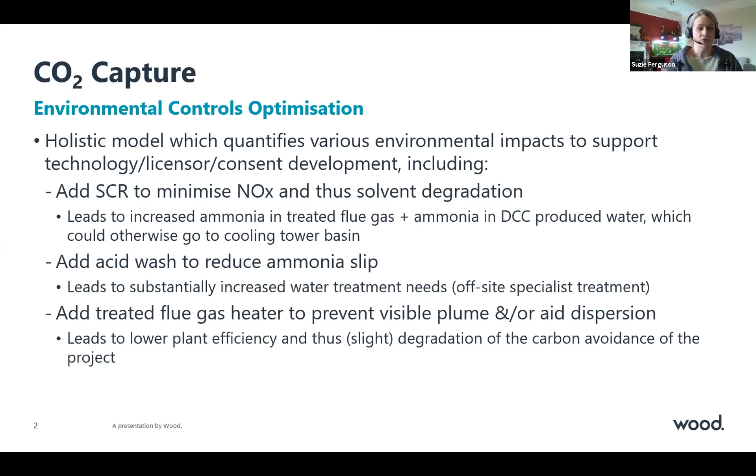So this is my suggestion from the area of CO2 capture, specifically for post-combustion applications.

Then in terms of hydrogen, I can't imagine anyone will be too surprised to see this suggestion. So Wood wears two different hats when it comes to blue hydrogen generation. Our group in Milan are specialists in being a licensor for steam methane reforming technology.

But in the UK, in our consultancy office, we're very much technology neutral, and we very frequently do licensor selection for things like hydrogen units, in particular for a refinery, where we'll get multiple bidders in, and it won't always be our technology that gets put forward. It will be the technology that's right for the project.

So something I would like to see is that, very often, because of the nature of how we're trying to predict the future and where the future is going to go, it's completely understandable that where information is available on a technology like the ATR with gas heated reformer, and that particular information in the public domain has a better performance compared to, say, the SMR that's in the BEIS benchmarks, it's completely understandable that all of the models subsequently developed from this, like the energy systems models, would therefore always choose an ATR with the gas heated reformer.

What we would like to see, or what we understand, is that there are 3 different technologies that are all very level from a competition point of view. It's very difficult to understand whether or not there's a genuine difference in the technology's ability to compete. The chemistry, when we've modeled it as independent consultants, is actually very similar between the ATR and SMR routes, with some more beneficial for different applications.

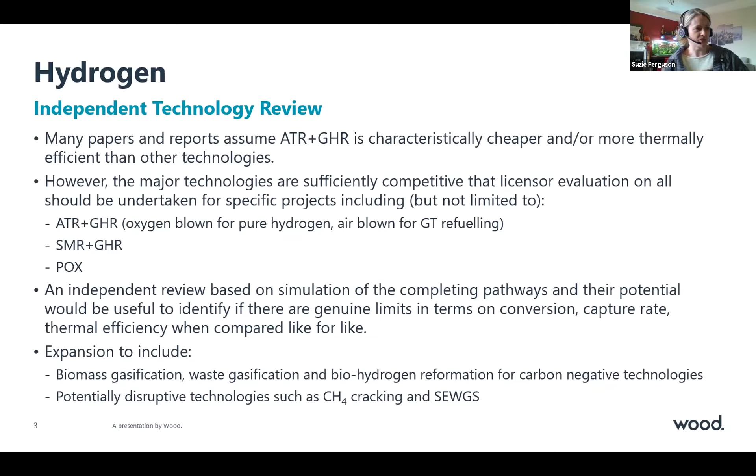My last slide is just two other ideas I wanted to throw out there. It may be that this has already been covered, and I personally don't spend a lot of time reviewing what's available. So apologies if there are studies already put out into the public domain that I just haven't seen yet.

I think it would be really useful to see a review of feedstocks available in the UK that can be used to make negative emissions hydrogen. That's either light liquid feedstocks, for example bioethanol type glycerol waste streams—glycerol is a byproduct of making biodiesel from vegetable oils. It's particularly suitable for reformation, which if you put CO2 capture on that reforming plant, would give you a carbon negative process, depending on all the other life cycle emissions through the process.

And the same for gasification—how much biomass and waste is realistically available, taking into account that we hope to have a more circular economy going forward, and therefore less use of plastics going to landfill or incinerators that would then provide feedstocks for gasification. So how much hydrogen could we make by these different routes, I think would be really interesting.

Then on a much more technical point, there are challenges when you take an existing fired heater and want to increase the quantity of hydrogen in its fuel gas, or change its fuel gas in some substantial way. We've looked at some really interesting projects where we would replace refinery fuel gas systems with hydrogen, or increase them to say 50% hydrogen.

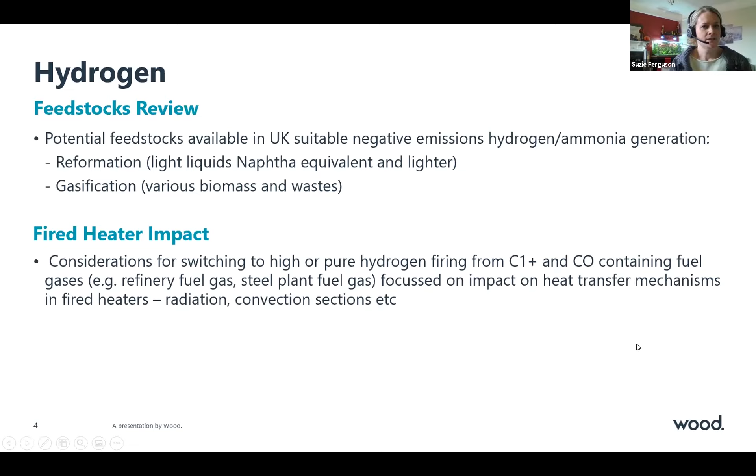Oh, that's great, some really nice thoughts, Susie. I love them, even if I don't understand them all. I'm sure a number of our listeners will.

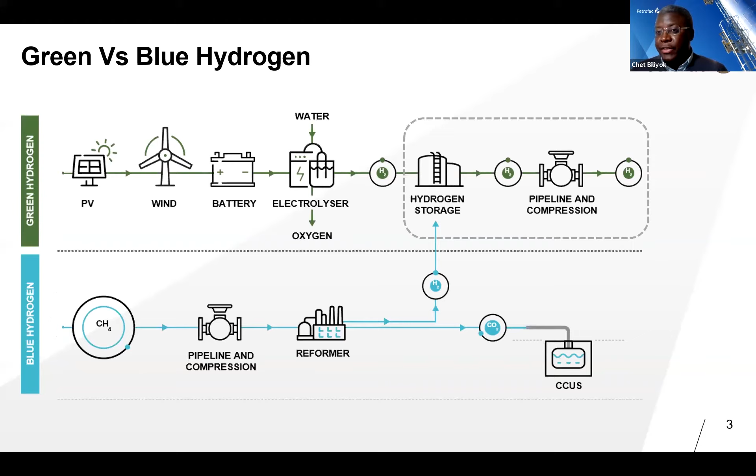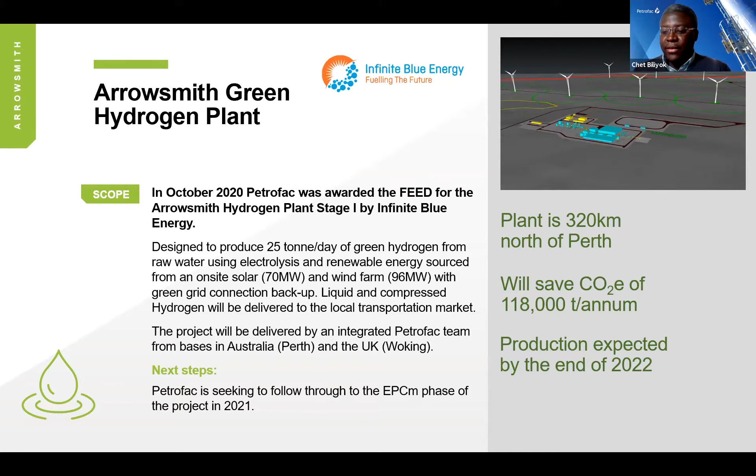Over the past 6 months, I've been working on this Arrowsmith Green Hydrogen project. I've been the process lead for it, among other things I do at Petrofac. It's a project I'm delivering in Australia, based in Perth. We are rounding up the FEED now, and it's going to be a 25 tons per day project using solar, wind, and grid connection to generate hydrogen with electrolysis.

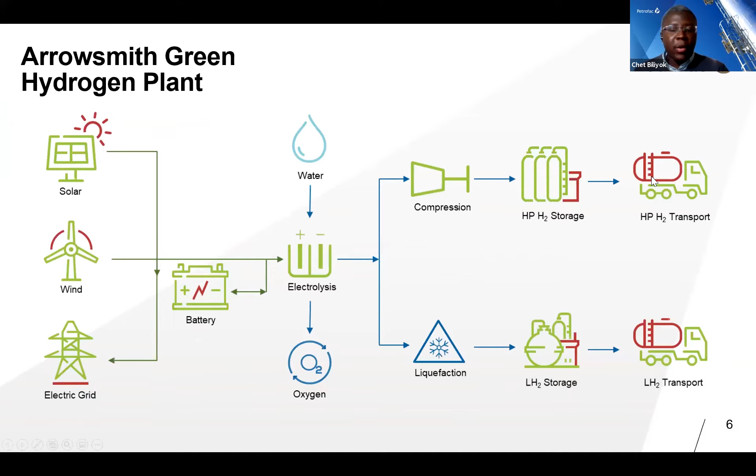So it's not the kind of thing UKCCSRC should focus on, but the areas of interest for me would be the storage and what we're doing there because of the challenges we've been facing. Now that we're generating lots of hydrogen, or will soon start generating lots of hydrogen, large-scale storage of hydrogen is really challenging.

Hydrogen is a very tiny molecule that occupies lots of volume at low pressure, so you need to store it. This 700 bar gauge is a target because that's the pressure at which you fuel hydrogen vehicles, that's the pressure at which hydrogen is stored. So that's the kind of minimum a number of projects are looking at because of the application. Storing that large inventory of hydrogen at that pressure is challenging. There are mechanical limitations on vessel diameter and other things around that.

We've been doing electrolysis at small scale and storing hydrogen at small scale, so composite tanks or composite vessels have been developed for those. Those are quite expensive. We need to move from that quickly and look at other storage mechanisms. If you want to store hydrogen as a liquid, you're basically talking about LNG temperatures, even lower than LNG, minus 253, 254 degrees Celsius, if you're going to store it around atmospheric pressure. Those things require a lot of energy.

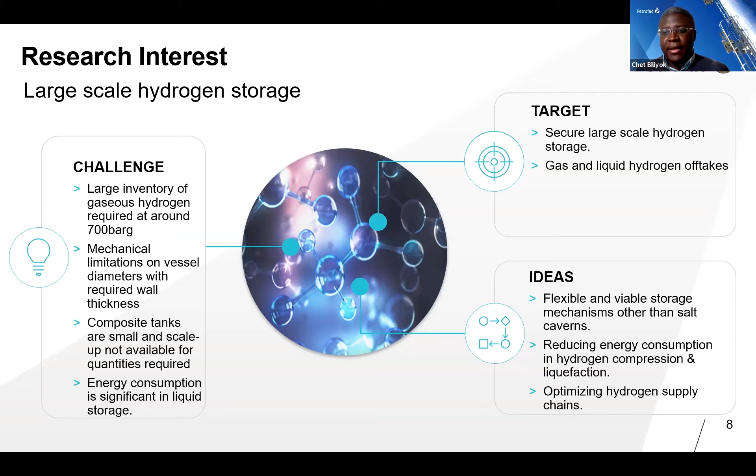When I say supply chain, I'm talking about the demand and supply of hydrogen. So where do you locate your blue hydrogen plant, and what are the off-takers, what's the industry around it that will be able to use the hydrogen, that would make it economic to put that blue hydrogen facility there. Those are kind of ideas that I have, and I think that would be a good start for hydrogen.

Now moving on to CCS. I see Ian is here, I'm going to talk about Acorn, but Pale Blue Dot is here too, so apologies Ian - this is something you already know quite well, in fact more than me. So I'll just cover quite quickly what Petrofac is doing in Acorn.

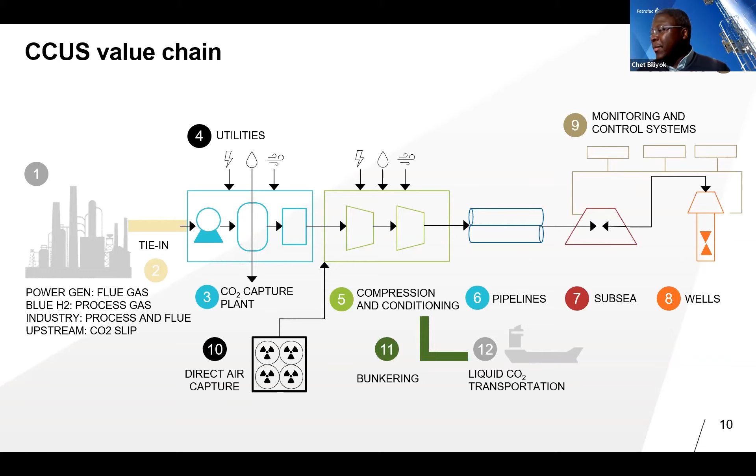For CCUS, I just want to point out that it's a large value chain. It should really be focused around the technology for CO2 capture, but then the value chain is vast - you have the industries or facility you're capturing the CO2 from, the tie-ins, the utilities, compression, conditioning, pipeline, subsea wells, monitoring, direct air capture, bunkering, liquid transportation. So you can take your pick.

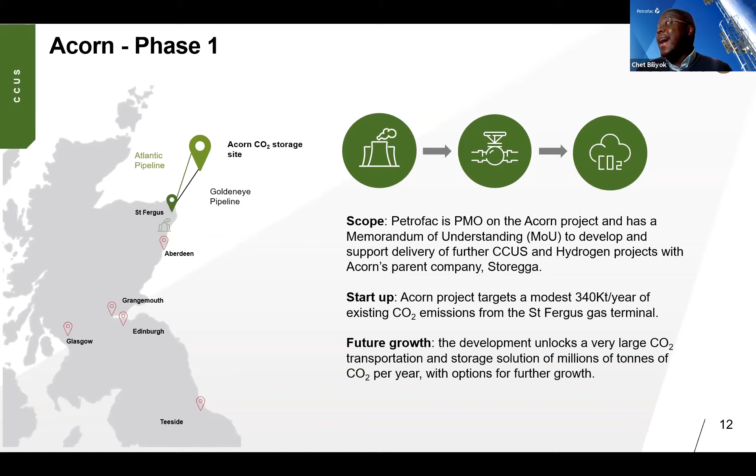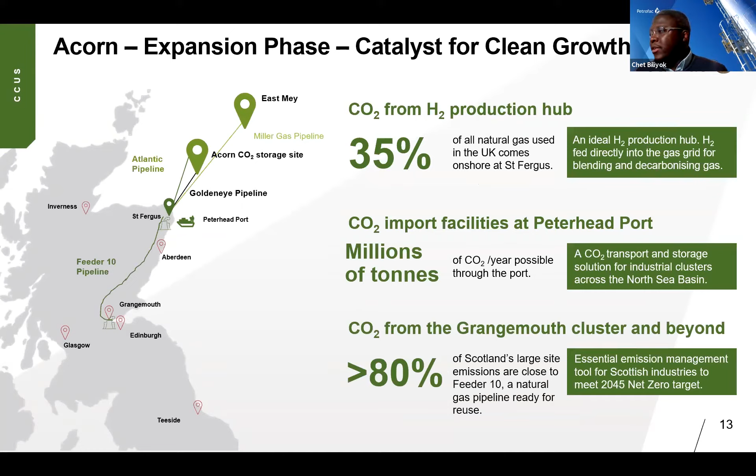This is what we see in Acorn, a project that Petrofac is supporting as the project management office. We're supporting Pale Blue Dot, providing our technical expertise to push the project forward, which looks very good. At the moment the first phase, the 340,000 tons per annum facility, should be moving forward and getting developed, and there is future expansion to consider, so there's a hydrogen hub on that development now. All of this is publicly available information, so I'm not sharing anything new, but I'll keep this slide quick.

So what am I looking at systematically around Acorn? I'm sure I'm not the only person that will talk about this - I know someone will talk about measurements very soon. So metering, really cost-effective metering and fugitive emissions is something I want to focus on. Very systems approach - the thing about CO2 is that it's essentially a waste stream, so we don't really require that much accuracy in terms of measurements and all the whole custody transfer and those kinds of things that go around metering.

The considerations really for metering and for CO2 purity or quality should really be about materials. We should ensure that the CO2 transport doesn't have free moisture that would be corrosive and impact the integrity of the transport infrastructure, and all the other good stuff around that. So let's keep that in mind - rather than trying to get stringent quality requirements for CO2, yes it's a waste stream, we're trying to get rid of it, so how do we do that effectively?

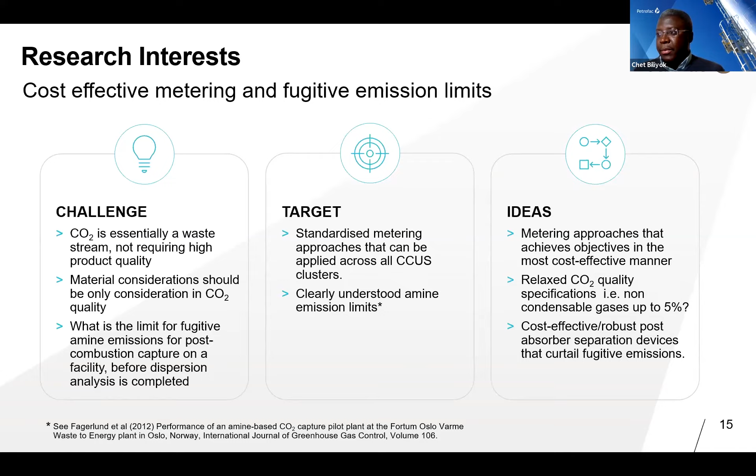That's what I have for you. Again, systems approach, and it'd be nice to see what the discussions come up with.

Right, I will blow through these slides very quickly and come to the last one, which is the main talking point. My name is Keith Birch and I work for Suez Group, and we are one of Europe's largest owners and operators of waste recycling collection facilities, also water treatment, sewage treatment, and specialty chemical supply and technology business. What we are here to talk about today is energy from waste, because that's our largest area of CO2 output, and it's a key area we think in carbon capture storage projects going forward, and also potentially to some extent hydrogen projects as well.

So there are 3 main conversion technologies involved in energy from waste: combustion, gasification, and digestion. We use all 3, and we own and operate all 3 types of plants. We make the selection as to what type of plant we're going to use based on, broadly speaking, what's the most energy efficient solution. In the case of the project we're going to talk about today, and the majority of the UK, that's energy from waste through direct combustion.

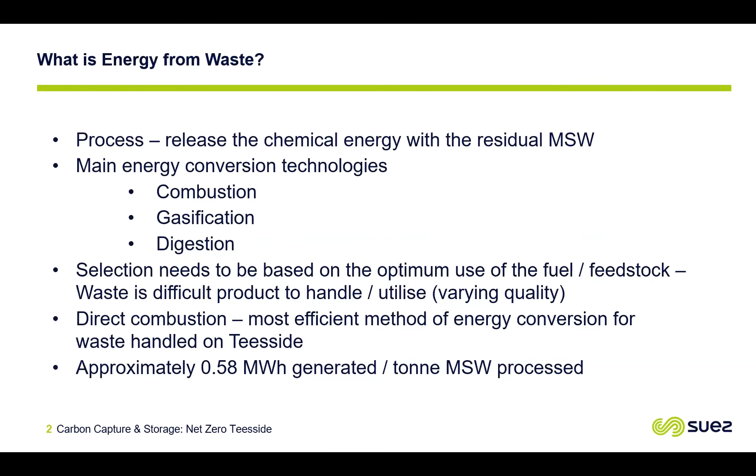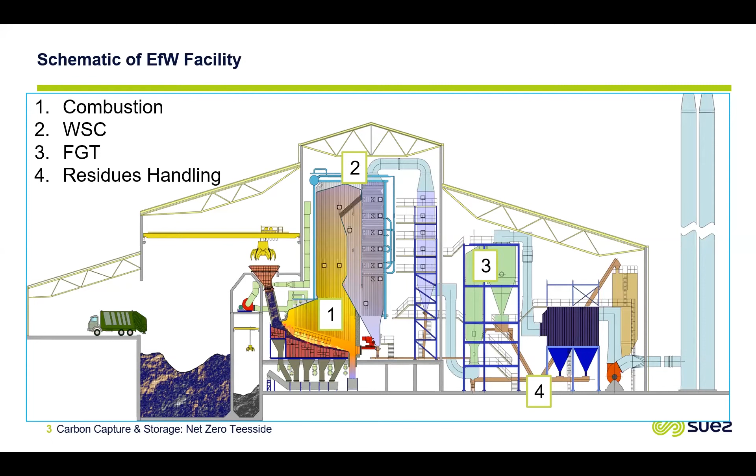So in terms of the process, it takes pre-sorted waste. I've used the example of the Teesside project. We collect all of the waste from Northumberland, from the local authority, from houses, businesses, etc. We sort that waste and remove everything which can currently be recycled, and we're left with a residual material which is burned. You can see a layout of the plant here. We mix the fuel, put it into a combustion system, generate steam, and use that to spin a turbine. We then have a gas emissions reduction and cleanup system which sits on the back end.

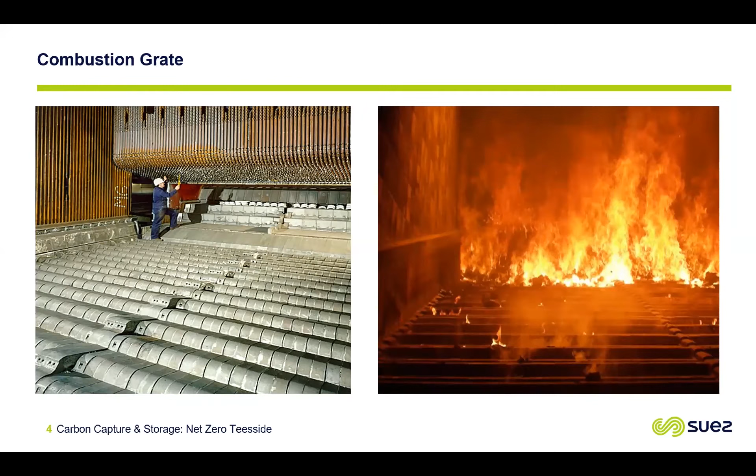This is what the system actually looks like - this is the grate itself. It's a moving grate, and the refuse is placed on that and incinerates as the grate moves.

The particular project we're talking about today is the Net Zero Teesside, which is now combined with the Humberside hub, as I guess many on the call will be familiar with. The plan here is to build a ring main system for the collection of CO2 from industrial users. That will be combined with the output from a dispatchable power plant, which will be built, owned and operated by BP on behalf of the Net Zero Teesside hub, and that will then send dense phase CO2 out into the North Sea for storage in the Endurance Aquifer.

We have 2 facilities on the complex, each of which has multiple trains. The site we're looking at for our initial development is the one identified here as Haverton Hill, and we're proposing to put a 162,000 tonne a year capture facility onto that plant, representing 2 incineration lines at that facility.

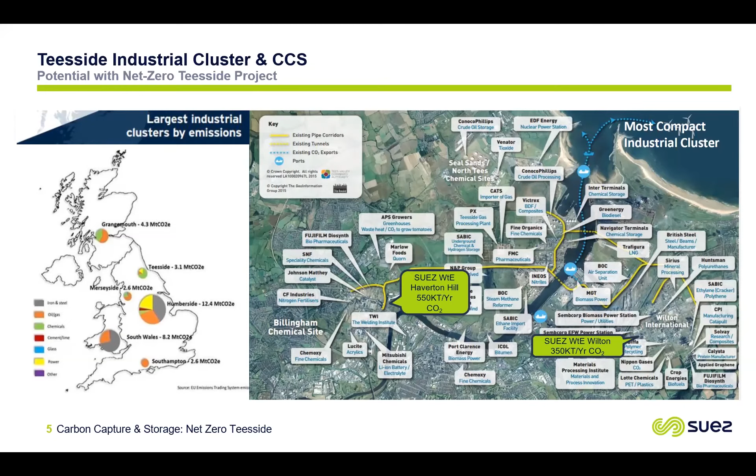In terms of our previous expertise in this area, we have a division called Suez Oil and Gas Division, and they have been involved in both carbon capture for standard conventional onshore and offshore oil and gas projects in the past, and also quite a lot of work, particularly in Australia a few years ago, around building skids for carbon capture storage, with the largest plant being the 50 tonne a day pilot at the Hazelwood coal-fired power plant in Australia. We have experience, within those pilot plants, of a wide variety of different solvents.

Moving to the top left, this is an overview, aerial view of the Teesside facility, the Haverton Hill facility, with a graphic there. You can see next to one of the existing plants, there's actually 2 plants on the same location, and you can see that we've superimposed our proposed 162,000 tonne a year unit there.

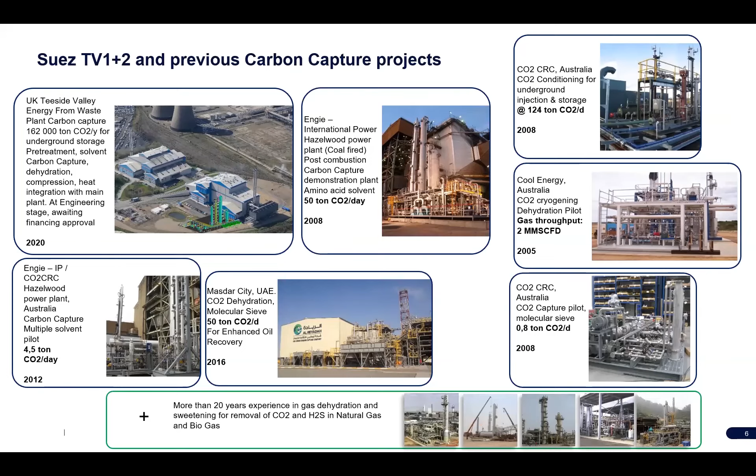The last slide is kind of where we're up to, in that we have pre-feed work in progress, and we have a number of designs, or variations of the design, on the table. It's interesting that the previous 2 speakers highlighted many of the issues we are now facing. First off is what amine do we select, particularly based on the impact that amine selection has on the energy balance from the site, and the impact on the existing output of the plant. What are the utility requirements? And then the biggie really, which is what is the impact on effluent and emissions, of both the amine selection and the technology we use to mitigate any emissions.

I think both of the previous speakers identified nitrosamines, particulates, aerosols, and there's a real lack of information around many of those things. There's also a lack of information about metering and monitoring, and then also around decisions like, do we vent the output from the regenerator column directly to atmosphere, or bring it back into one of the existing stacks where it goes through the existing CEMS monitoring system and through the existing dispersion model? There's also then what impact it has on the back pressure, the flow of air, etc., through the existing facility. And these are all issues which we are working with in real time now.

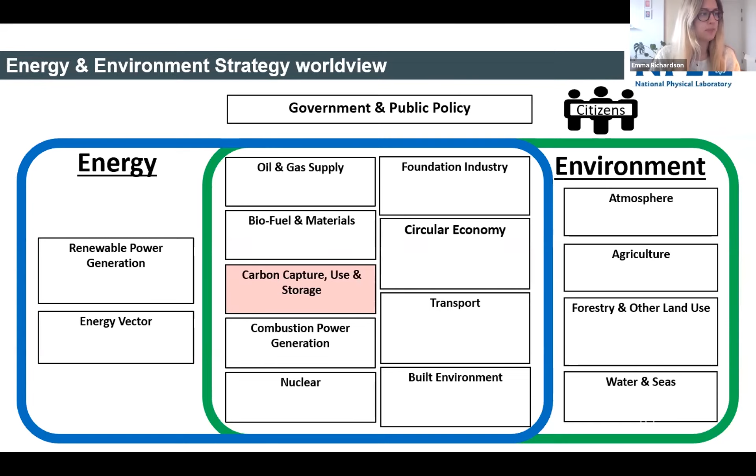So very quickly, a bit of background on what I do and how we came to the research needs and measurement needs that I'll be talking about in the next few slides. Really my role at NPL is to conduct these sector reports, to do a deep dive on how measurement science can add value to certain sectors or future themes. The process is to conduct a literature review—that's standard.

Stakeholder engagement in an event is probably the bit of most interest to you all, and hopefully some of you joined our webinar series held in October last year, which was really to get industry and stakeholder input into what the most high priority measurement needs were from our perspective, and understand whether there were any we were missing, so NPL could get a whole view of the needs across the entire CCUS supply chain.

We broke that down into capture, transport, storage and usage. More specifically, that was then put into a CCUS report, which we launched in February of this year, free to download and available from our website. I'll provide a link at the end, and the slides will be shared. We review and update this on a regular basis to track our progress against meeting those measurement needs and challenges, or identify where projects have been developed or exist to support meeting those needs.

So as I mentioned, we held the workshop last year. We had over 100 attendees from various different companies across not only the UK but internationally, working in the CCUS space. The purpose of these was to capture and validate the high priority measurement needs relating to CCUS. We did this by hosting a workshop in person at NPL in Teddington.

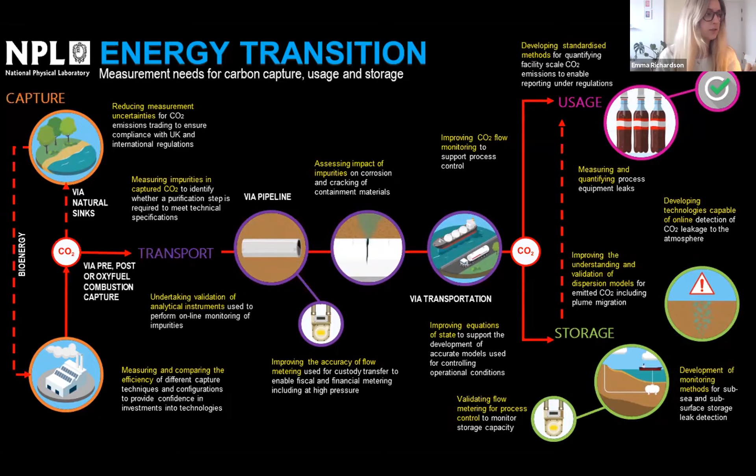Through that report process. But in more detail, and probably of more interest today, was the industry validated needs that we came up with, summarized through this table on the screen, broken down into capture, transport, usage and storage. For the purpose of today, I'll focus on capture, and these were prioritized as follows.

The highest priority, as validated through NPL and through our stakeholders, was measuring and comparing the efficiency of different capture techniques and configurations to provide confidence in investments into technologies in support of CCUS business cases. This includes a full lifecycle analysis and direct measurements of those capture techniques.

The second was undertaking validation of analytical tools that would be used to perform online monitoring of impurities, which could indicate degradation of certain capture solvents or give a general indication of capture performance.

The third was understanding impurities in captured CO2 to identify whether a purification step is required to meet any technical specifications, including any cross reactions between impurities from differing capture processes.

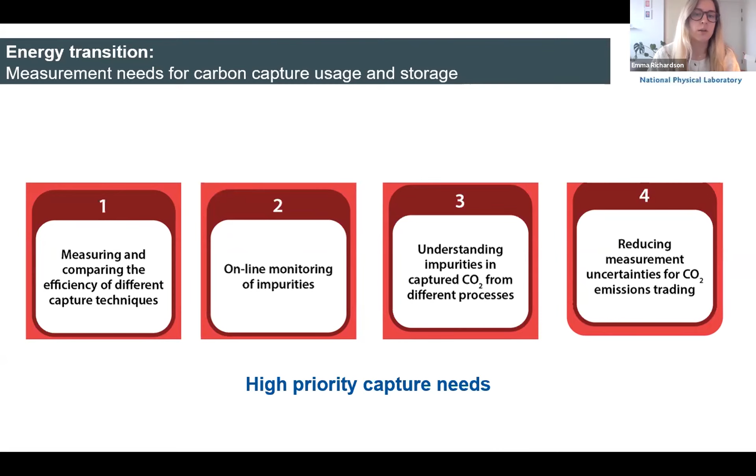And finally, reducing measurement uncertainties for CO2 emissions trading to ensure that we're compliant with both UK and international regulations in that space.

Very briefly, I know we're also talking about hydrogen in this space. We actually conducted the same process I just described for CCS for hydrogen back in 2016 - the exact same process, a workshop and stakeholder validation, and we produced a report and infographic, also free and ready to be read for those who'd like access. In a similar sense, we set this out across the entire potential supply chain and use chain of hydrogen, in terms of production, distribution, storage, and then the variety of different end uses hydrogen could have in terms of transport and combustion for heat.

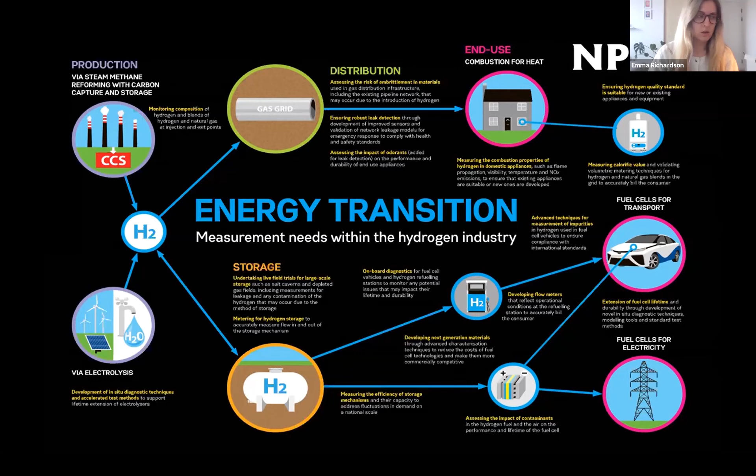The main top priority challenges, or research and measurement needs, that we found from that process included materials development for fuel cells and electrolyzers, which since 2016 has been an area of real focus for NPL - we've been developing a lot of capability and working on many projects in that space, primarily from our electrochemistry group. Also, things around blend ratios if hydrogen is to be mixed with natural gas in the grid, and assessment of odorization for leak detection, which has since become a project we've worked on with industry following this report series.

Measurement of combustion properties, looking at the suitability of the existing gas infrastructure, and then materials - this links quite heavily to corrosion, and we have a lot of capability at NPL related to measuring and monitoring corrosion - and validated techniques for hydrogen storage, which again links to similar capability we have in terms of CCUS, in terms of monitoring and measuring storage mechanisms to ensure metering, leak detection, and that the storage is safe and suitable.

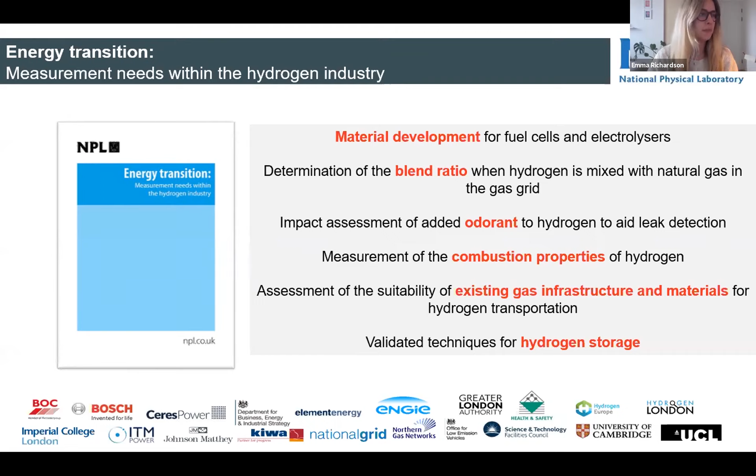And you can see some of the organisations involved in that process back in 2016. So that's everything from me. Hopefully I haven't gone over time - apologies if I have. If anyone has any follow-up questions or any technical specific questions about any of those measurement challenges, I'm happy to put people in touch with the scientists directly. Hopefully I can answer any general questions, but thank you - that's everything from me.